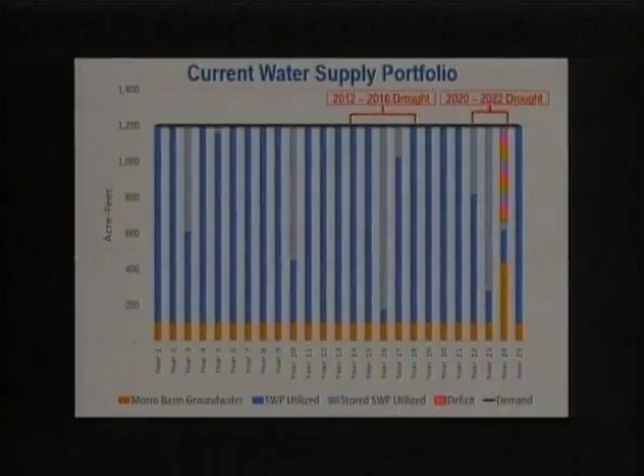Dan, when I look at this graph, it suggests to me that there are recurring significant droughts, but they recur in a relatively organized fashion every few years. But I would think that we're experiencing droughts that are going to become increasingly devastating and come increasingly sooner than we expected. I don't know if that's depicted in that graph. Am I wrong about that?

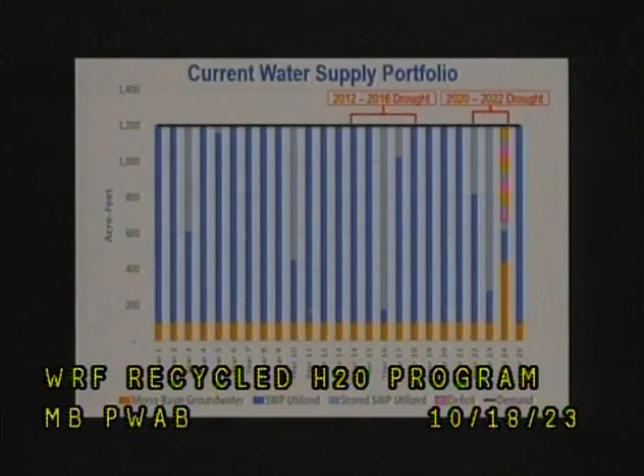Are you asking if the projections account for climate change? Essentially yes, the projections do account for climate change. Climate change impacts are anticipated to bring wetter wet years and drier dry years. We only looked at a 25-year record here because it's more manageable for people to see and understand, but the model can be run over hundreds of years, and you would see more frequent, more extreme dry periods and more frequent, very extreme wet periods, as we saw in 2023. That was a real juxtaposition, going from the worst 3-year drought on record to a year of historic rainfall. We can, unfortunately, anticipate similar conditions moving forward.

I would add that it might sound like a very positive thing that we get a lot of water all at once, but depending on how the precipitation comes down in the Sierras, that may or may not actually be a benefit for our water supply. Just because we have wet years doesn't necessarily mean that state water is in a good position that year. It all depends on the snowpack. Another anticipated effect of climate change is that wetter years will be wetter, but they may be warmer too. So if it's warmer, that means less snowpack.

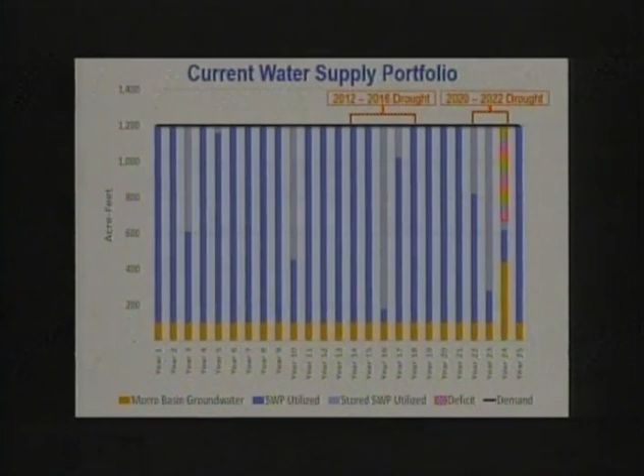Moving on to the next slide, this is a summary of the state water allocations in San Luis Obispo County. We've highlighted the city's allocation in green here. Its water service amount and its drought buffer are the numbers used to calculate how much state water and how much stored state water it can generate in the supply model.

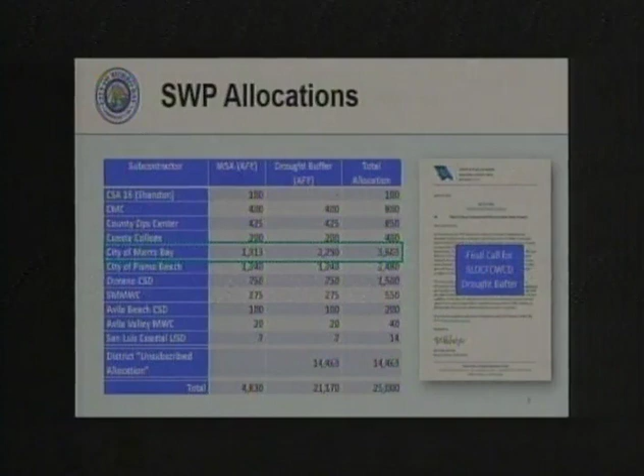What you can see at the bottom is the district's unsubscribed allocation, the 14,463 acre-feet per year. That's the supply of water that the city and other state water subcontractors have really benefited from, since the district doesn't have any other use for that water. It basically generates water available for the city and other subcontractors during dry years should they need it. But as alluded to on the right, the district has final call, because they want to make better use of that water. A lot of that water spills and provides no benefit to anybody, whereas all of the countywide taxpayers are the ones paying for that water currently.

So that's a little bit of an overview on the state water allocations. Moving on to the fund.

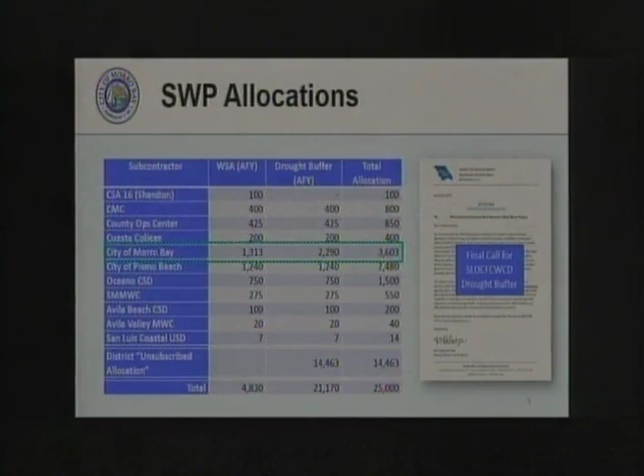I would just add that that's up to the district. We think that's probably true, but they may have other arrangements, transfers, or agreements they may utilize to have that water available for Los Osos.

Moving away from the water supply driver and into the funding and financing requirements. I've got a couple of slides summarizing the recycled water program implementation requirements for the city's two low-interest financing loans and two awarded grants.

Looking at the implementation requirements, they vary based on the different agreements, but they're all binding and required for the city to access this low-interest financing or grant funding. It varies from multiple injection wells—meaning one injection well is not sufficient—to a recycled water production target of 412.5 acre-feet per year within a 5-year time frame.

The Title 16 grant specific funding requirements are still under development, as the city hasn't received its formal grant agreement. The IRWM grant requires 2 or more injection wells, per the language in the draft agreement.

These grants and loans together represent around $150 million of funding.

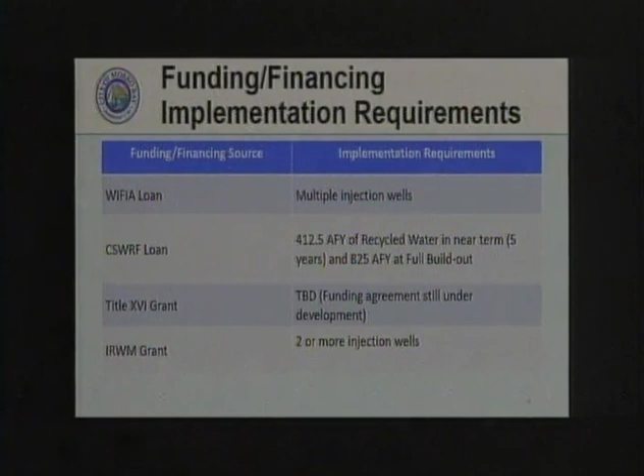There are also schedule requirements for those funding and financing agreements. The city has been working with these funding agencies for a number of years, and there are deadlines associated with the original agreements. In some cases those deadlines have been extended, but what we've been hearing is that these funding agencies want to close out these agreements and programs—they don't want these to linger—so these are the deadlines the city is currently working with.

January 1st, 2025 for the WIFIA loan; August 31st, 2023, though that one is being amended as I described through an SRF amendment; and then September 30th, 2025 and September 30th, 2026 for the grant funds.

So there are implementation requirements, and there are timelines for those requirements to be implemented—not unlike the time schedule order the city was under for constructing its new wastewater treatment facility.

Finally, the third driver or requirement is to fulfill city council direction to incorporate recycled water as part of the WRF program.

These are just a couple of examples—there were numerous public meetings and city council decisions that sent the city down the recycled water path. We've highlighted a couple here, such as the WRF program EIR certification and the Clean Water State Revolving Fund resolution adoption. Both occurred in 2018, as examples of where the city council directed staff to pursue and implement a recycled water program and enter into contractual agreements that require that.

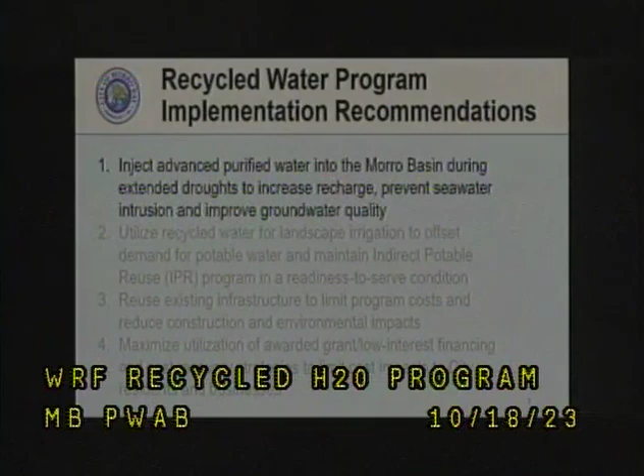I see Dave around town. He's also a musician, likes to perform at local venues.

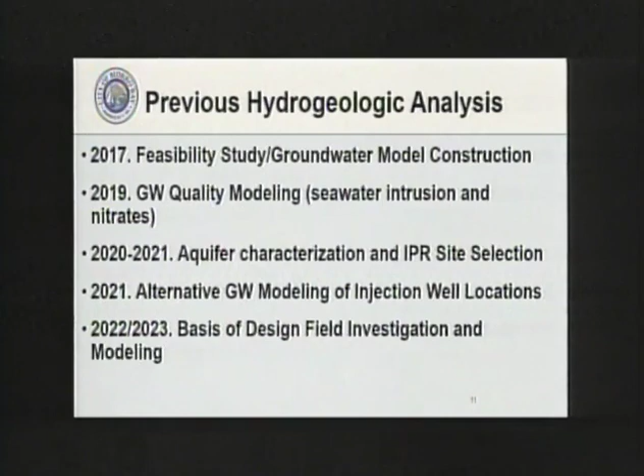The injection well construction and testing that's specific to the IPR project here. Last summer, there was contractor selection, and we went through well design and construction. Rolling into September, we performed well construction with Pacific Well Drilling, and we did traditional aquifer testing on it. In October, we did the wellhead design to inject water into the well, and we did a step test.

We had to take a pause in November for the state water shutdown because we didn't want to be impacting operations during the production well operations. And in December and January, we performed an extended injection test of over a month in an effort to get a real physically based good handle on what the groundwater velocities are out there.

And then since February, we've been analyzing all that data we collected, doing some groundwater modeling, and delivering and producing the basis of design report.

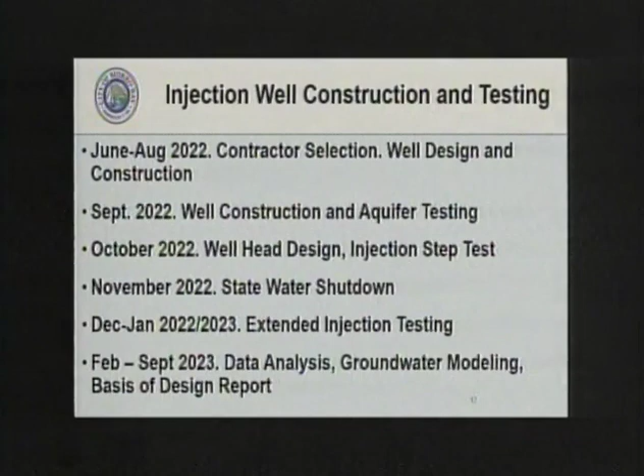This basis of design report's not the first time that there has been drilling and aquifer characterization work done out here.

Do I have a pointer on this thing? Okay, anyway, there we go, thank you.

This figure shows all of the borings that we've identified historically in the basin. There was a lot of work done at the PG&E plant associated with contamination out there. There was a whole lot of holes punched in the ground up here by the old, I don't know, it was Arco, a gas station up here at 41 and 1 that had some leaking tanks back in the early 90s. And there's traditionally been a few borings done along this alignment that were associated with the seawater intrusion wells installed back then. And of course, the city has wells here in what we call the Highway 1 well field. These are the high school wells. So my point is there's a lot of legacy and historical data that we accessed to do this work.

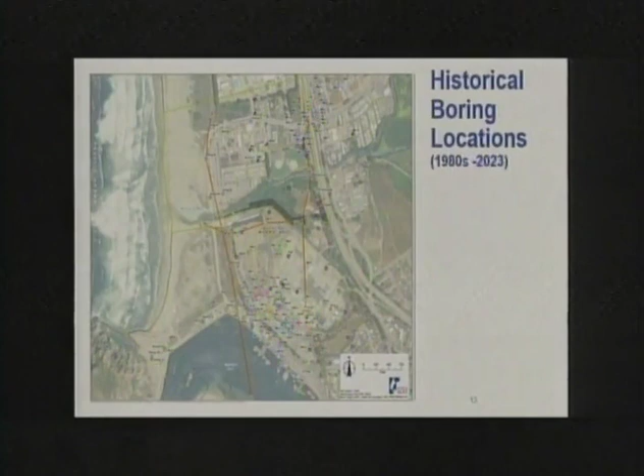There are some detailed cross sections generated in the basis of design report. This is just a simplified version of those cross sections, and in almost every case, we have at the top of the saturated zone a zone of fine-grained sediments, silt and clay, which is generally not considered an aquifer. Lower down, there's sands and gravels that are good for aquifers. That's a simplification, but that's generally what we call the conceptual model, which is the way we see things.

It's that way in the injection zone, and it's that way by the Highway 1 well fields. So this is just a simplified cross-section. Yes, sir. Your monitoring well is only about 50 feet from the injection well, is that correct? That one of them, yes. So this was all extrapolated from that distance over the whole field, correct? Well, when we get to the injection test, there was a lot of data taken from that monitoring well.

This cross-section is a generalization of almost all of those borings that I just showed you, whether they were up by the gas station, over at PG&E, or out by the old treatment plant. They almost all have this stratigraphy: there's 20 to 40 feet of clay and silt at the top, and 30 to 50 feet of sand and gravel at the bottom. So nearly identical characteristics throughout that area. Approximately, yes.

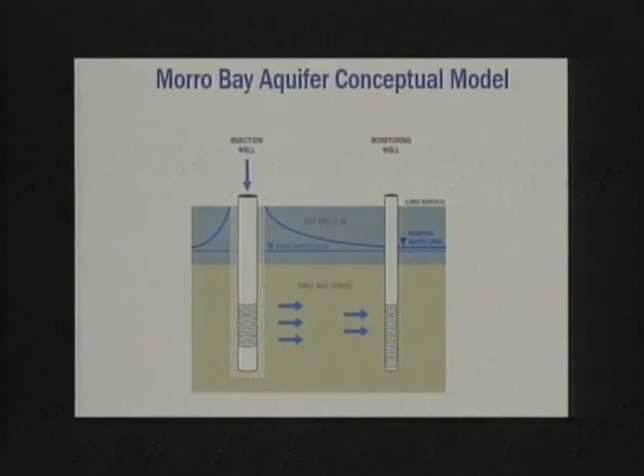These are groundwater level hydrographs. A hydrograph shows water levels through time. I included this even though it wasn't specifically part of the IPR or the injection testing, just to demonstrate something. There are 4 wells here: 2 in the Highway 1 field, 1 out by the old cement plant, and 1 of the high school wells. These lines represent the water level surface in each well, all superimposed. As you're aware, the city doesn't use the wells most of the year, but every November, thereabouts, when state water shuts down, the wells are used.

So you can see, here in November of 2019, the wells start getting used and the water levels go down. But come December, January, when you're finished with that, the water levels recover pretty quickly. That's the main reason I wanted to show these graphs: every year during the state water shutdown, the water levels go down, and every year as soon as the wells are finished being used, the water levels recover quickly.

This 6 to 8 month period here at the end of 2021 was during construction dewatering for the pumping station. You see the water levels declined for much longer than a month. That wasn't because the city was using the water—it's because they were pumping groundwater across the street from the high school for dewatering so they could build that facility. But as soon as construction finished, within a month, water levels recovered back to about their previous level.

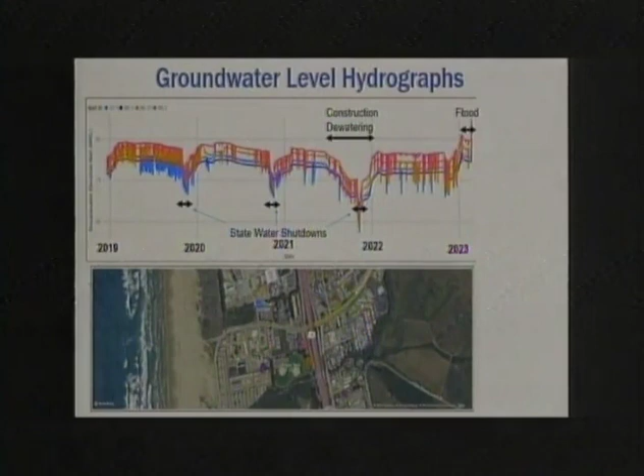These are a couple of graphs that demonstrate historical data for total dissolved solids, which is indicative of seawater intrusion. Without going into too much detail, I'll point out these graphs for MB3 and 4 in the Highway 1 well field—you can see this large spike in total dissolved solids. This is back in 1991. This is showing you that seawater intrusion did happen here. So this isn't just something that might happen someday—it happened back in the drought of '88 to '92.

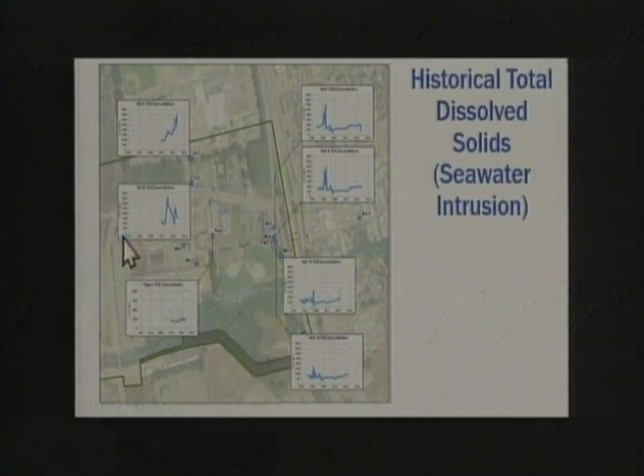The concentrations went down pretty quickly afterwards—so here in the Highway 1 field, you can see that; this is in the 90s. The high school wells weren't installed in the 90s, so you're not seeing it there, but they're a little closer to the ocean, and you can see the total dissolved solids did rise this past year or two. They're on the way down again too. But this is just to demonstrate that seawater intrusion is a real risk here—we're very close to the ocean.

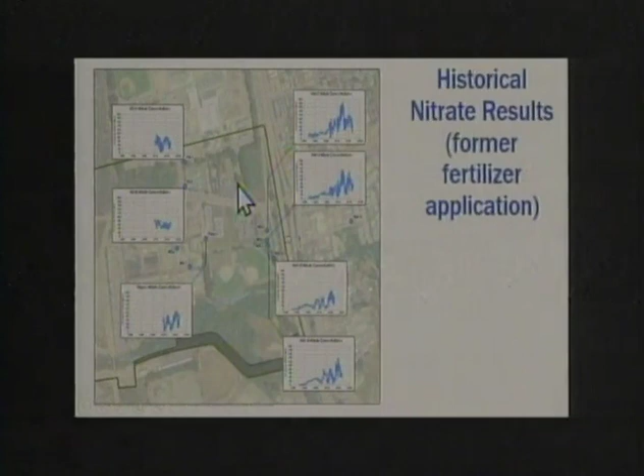These are nitrates in the city's wells. Here in the Highway 1 well field, you can see going back into about 2000, they spiked. We believe it's a legacy fertilizer application from the agricultural fields up gradient. They've been on the way down for the last 10 to 15 years, and there's no spikes here in the high school wells. So this is just laying the groundwork, the base conditions in the aquifer.

Okay, I'll talk quickly about the injection testing that we did. The site is in the permanent easement on the Vistra property south of Morro Creek.

Initially, after we installed the well, we did traditional pump testing where we pump water out and calculate transmissivity and other parameters of the well to establish well yield. We pumped the well at about 90 gallons a minute. We did a 24-hour constant rate test and a traditional extraction analysis.

Then we did injection testing. Initially, it was spec'd to be only a 7-day test, but we decided after thinking about things that we would extend that to a longer period of time. This is where we're talking about the monitoring well you were asking about - there's a monitoring well about 50 feet away from the injection well.

So you may or may not be aware, groundwater moves pretty slowly, right? We're talking about a couple of feet per day in most cases. But groundwater velocity - at this point in most projects, we're using modeling to determine groundwater velocity. So we thought, look, why don't we extend this injection test?

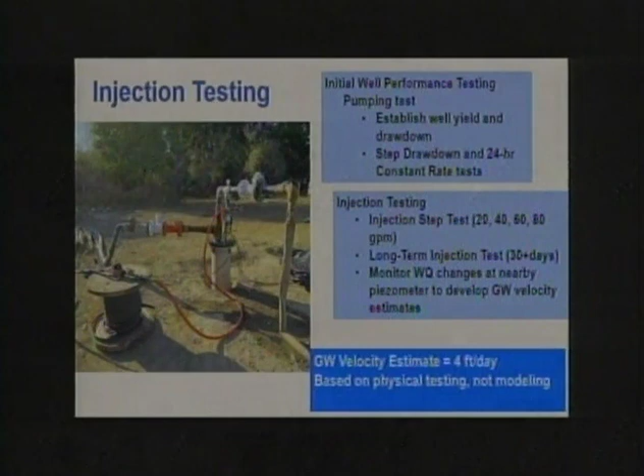And most projects at this point in their completion really don't have this. The regional board was really supportive of doing this effort. So the injection testing completed, and we proceeded with the analysis and started producing the basis of design report.

One thing I'm going to focus on here is groundwater modeling scenarios. We tried to identify places to put the injection wells, and the things I want to point out are that the injection rate of 887 acre-feet a year - that's a full build-out scenario, right, Dan? That's far more than is anticipated to be even available to inject now.

But I believe it was for permitting purposes. They said, well, let's run these full build-out scenarios so we don't have to go back and change the permit later. I think that's correct, yeah.

So I'll show you where we ended up selecting the locations for injection wells, and then we tried different levels of groundwater pumping. We really started down around 500 or 600 acre-feet a year, which is what you currently are permitted for, and we amped it up to 1,000 acre-feet per year, sort of in increments.

We used the 4 Highway 1 wells, the 2 high school wells. We used MB 13, which is east of Highway 1 - it's a mothballed well, but we did a pump test on it a few years ago and it still functions. Then we put a new well in the model across the street from 41, but it could be anywhere. The point was we wanted to move the pumping away from those 4 really close wells in the Highway 1 field.

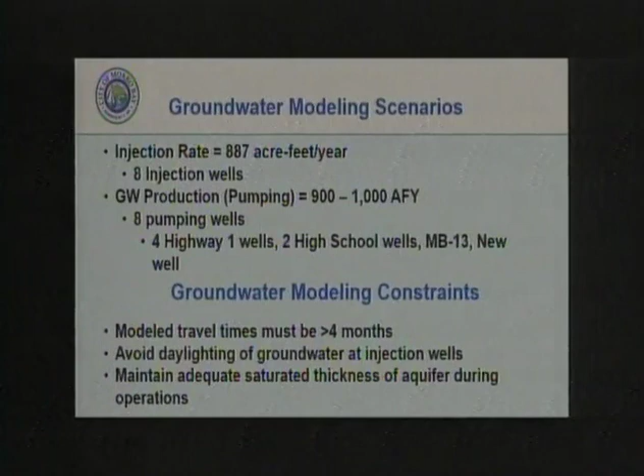Second, we wanted to avoid injecting at rates so high that it would bring groundwater up above ground surface, daylighting of groundwater. That could be a nuisance, and we considered that to be an infeasible consideration. And also, we wanted to make sure we weren't pumping so much that we would dry up the aquifer - we tried to maintain 50% of saturated thickness during operations.

So this is just one of multiple figures like this that are in the basis of design report, but let me point out a few things. Down here, south of Morro Creek, we have the permanent easement on the Vistra property. This blue dot in the middle is the well that we installed - we're calling it injection well 1.

We then put 2 other wells along in this area of the permanent easement. This area we feel is desirable because it's farther away from the ocean, so it's got more freeboard - there's more available headspace for injection there. Also, we've demonstrated that we can inject at 100 gallons a minute there.

So we located 3 wells here, then we located 3 more wells here along the western part of the permanent easement, and then we put 2 wells here along the coast. We only put 2 wells.

These wells are primarily to protect against seawater intrusion, these 2 along the coast. We anticipate injection rates here will be lower based on boring logs we've seen from that legacy data I mentioned. So I believe we modeled these 3 at 90 gallons a minute, these 3 at 75, and these 2 at 50 gallons a minute.

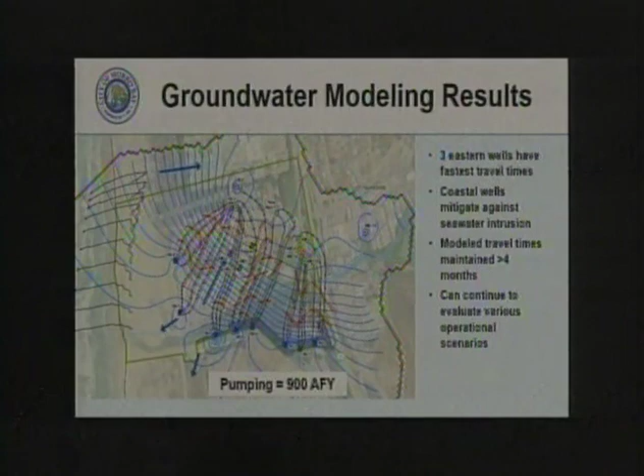Okay, so just a couple of discussion points. It's important to keep in mind these modeling scenarios in the basis design report are the most aggressive pumping and injection estimates currently on the table. We're injecting as much as we think we'll ever possibly need to, and pumping as much as we possibly can. This results in the shortest travel times that we can model right now.

If there's phased implementation of this project, or if we inject a lower total amount of water, that would result in lower groundwater velocities, a greater residence time, a higher travel time. But even with all these aggressive assumptions, we still maintained a 4-month residence time.

Lower rates or phased implementation will result in slower groundwater velocity, and we're going to continue to use this model to look at phased implementation and anything else that the council or you would like to see evaluated.

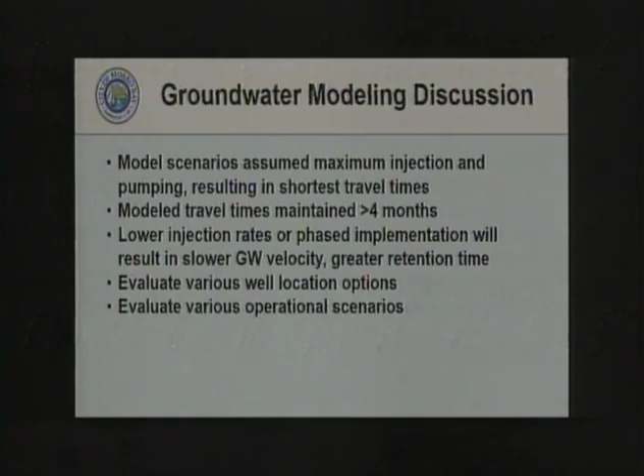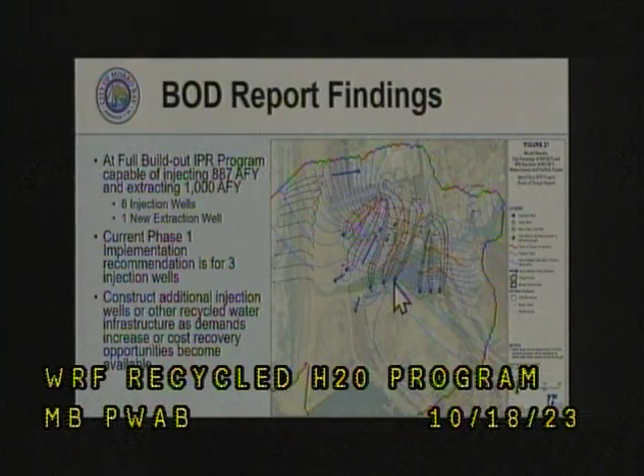Was there any complications because some of the wells may be in the area where PG&E formerly had its tanks? Here's their old tank farm, and we would be injecting north of there. If you inject into a well, half the water is kind of going to go the opposite direction. So if anything, we'd be pushing against anything that is currently at PG&E.

We're not worried about mobilizing anything that PG&E might still have in the ground toward the production wells. I know the site is closed, and we looked into it at some length earlier in the project. The thing that concerned us more than PG&E was that there used to be some sort of construction landfill between the injection wells and the creek. But we found documentation that PG&E excavated the entire landfill—it was concrete debris and things like that—and put fresh fill in there back in the 90s. So because we're injecting north of PG&E, we don't anticipate mobilizing anything toward the production wells.

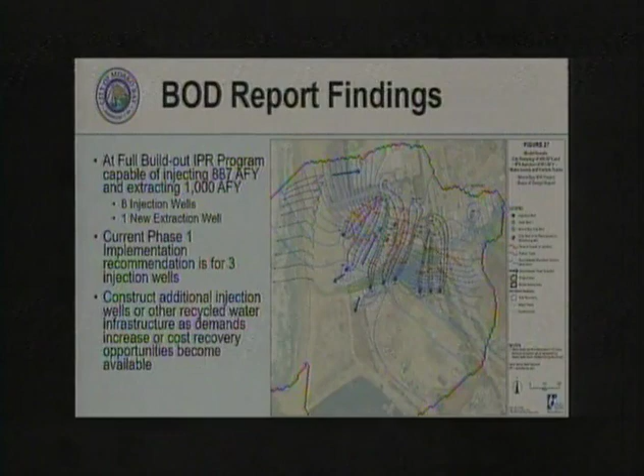I have a question, probably directed to Greg. Would the fact that we only drill 3 wells endanger our funding for the project? No, it would not. We will go into that in quite a bit more detail as well.

It's a good question, and it speaks to some of those earlier slides on implementation requirements of funding and financing. So it's really multiple wells, more than one or two. I think the most restrictive requirement is that 415 acre-feet per year of recycled water capacity—that really is what pushes us to 3 wells, and then, spoiler, a recommendation for some potential non-potable reuse opportunities.

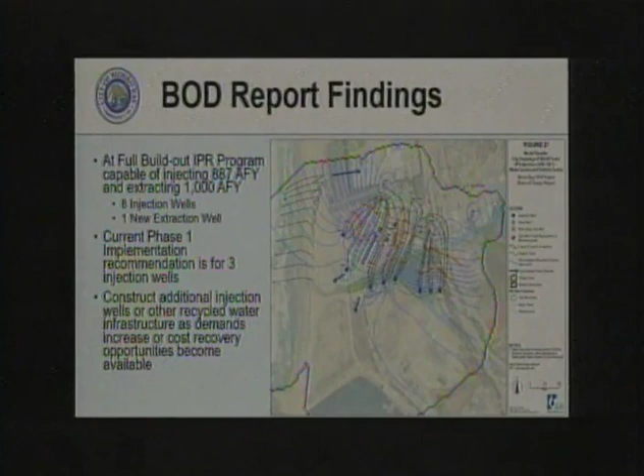Yes, thank you. This is a scenario that models 3 injection wells, so to tie it to the previous slide and the near-term recommendations. Just as we move down through the different recommendations, I promise the other ones aren't as long as the first one.

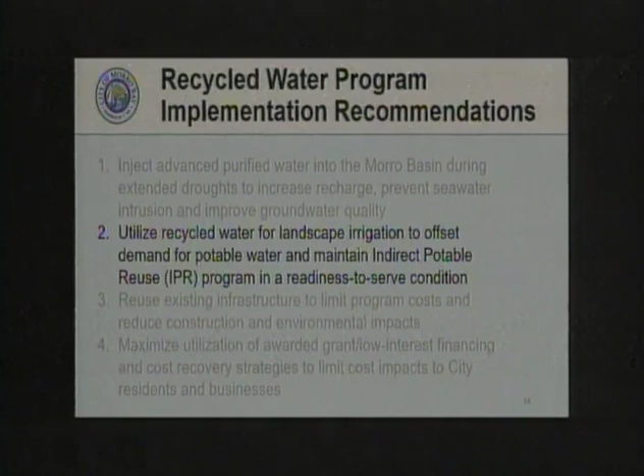The next recommendation is to utilize recycled water for landscape irrigation to offset potable demand, which is as effective, or in some ways maybe more effective than IPR at times. And then it helps us maintain the indirect potable reuse treatment facility in a readiness to serve condition.

As in a recent meeting we had with the WRF subcommittee, the mayor pointed out that one of the things the city observed with the seawater desalination program is facilities don't like to sit there unused. And if you have this treatment system, and if you're only planning on using it in drought years, how are you going to keep it ready so that when that drought comes, it's ready to be used?

So one of the big drivers for recommending incorporating non-potable reuse is that it would be a use year over year. It would keep the treatment facility in good working condition. It would keep the operators with consistent familiarity with how to run the system, so that when we really do need it in those drought years or in an extended state water shutdown, it's a supply the city can readily turn to.

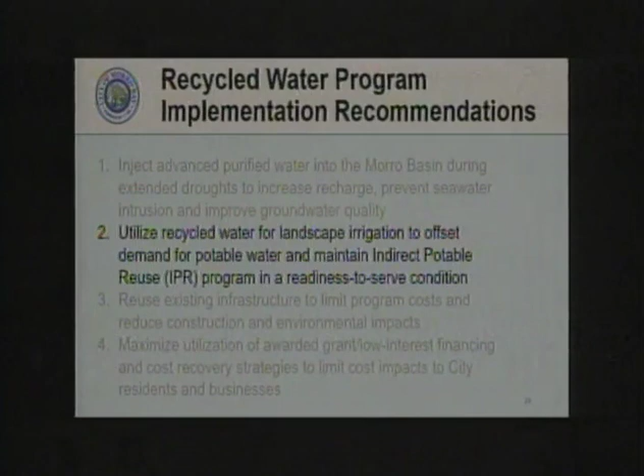When we looked at non-potable reuse opportunities for this recommendation, we didn't do an extensive evaluation of all of the different reuse opportunities. That work was done in the One Water Plan, in the previous planning work that really led up to the WRF program.

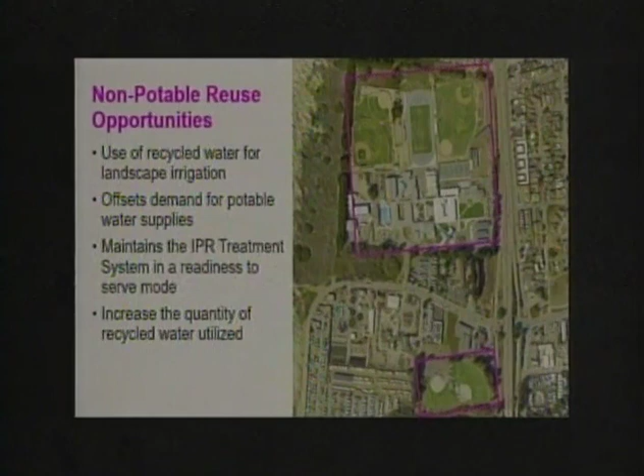What we really did is focus on the low-hanging fruit opportunities for where we can deliver recycled water to offset a significant amount of potable water demand. Those opportunities that are in close proximity to the proposed injection wells are Morro Bay High School and Lila Keiser Park. The other benefit is these two facilities are currently using potable water from the city's drinking water system, so it provides that direct water supply benefit by delivering them recycled water and lowering the demand for potable water on the city's system.

So then we added that into the water supply model. In the scheme of things, it's not a huge amount of water—we estimated roughly around 60 acre feet per year of non-potable water demand for those two facilities. But that's 60 acre feet of reduction in potable water demand, enough water for hundreds of houses, if not more, given the city's low water usage. It just continues to add to the reliability of the city's water supply. Again, the key takeaway here is we're not seeing deficits occurring in those extended droughts.

Greg: Thanks, Dan. I would imagine that the non-potable reused water is more expensive than state water, but less than indirect potable water. Is that correct? Can you characterize how much more expensive than one and less expensive than the other it might be?

We can, and because of the current infrastructure available, it gets a little complicated, but we'll cover that in a future slide. How about that? And I'll let Greg continue.

Thanks, Dan. Just wanted to mention that building this piece of it out also allows for future expansion. It doesn't take too much imagination to understand that in the future we could go down the bike path with the pipe and water Cloisters Park as well. That's one of the major users—I think we spend around $40,000 a year to water those lawns, and again that's all potable water that could be offset. But certainly not something that we're proposing in this stage of the project.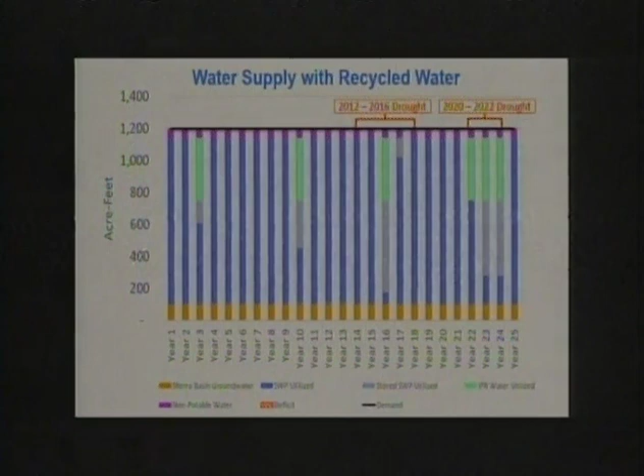Yeah, and speaking of cost effectiveness, connecting users to recycled water requires a lot less infrastructure than injection wells. So it's a way to get more recycled water use to meet those requirements of the funding and financing agreements.

With those pipelines getting to Embarcadero Road and crossing Morro Creek, we have opportunities to deliver non-potable water to the high school and Lila Kaiser Park. This combination of indirect potable reuse and non-potable use allows the city to get to that target of about 415 acre-feet per year for the near-term phase to meet the funding and financing requirements.

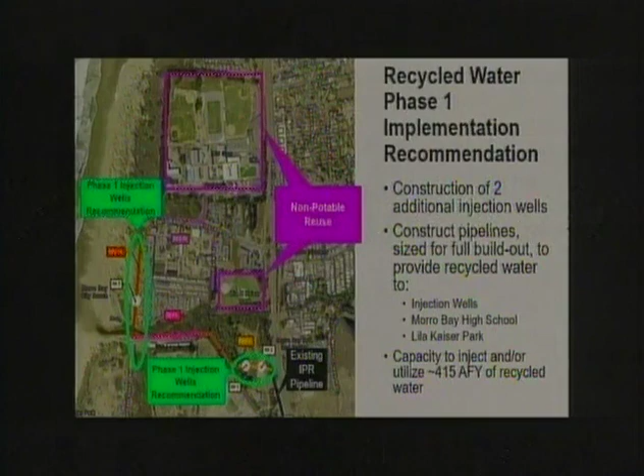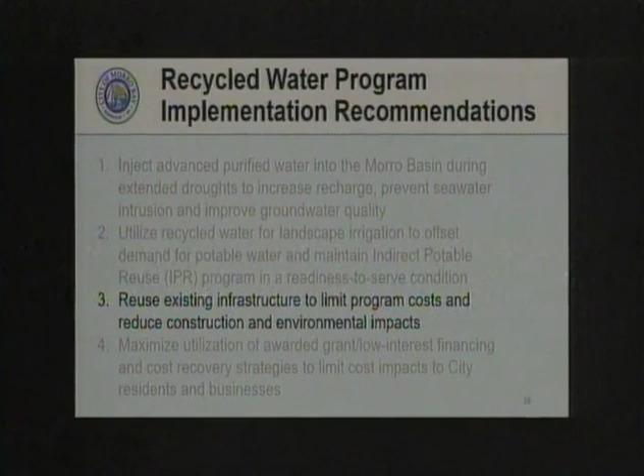So the next recommendation is how we can find the most cost-effective way to construct this initial phase of the recycled water program and then operate it, and also find ways to reduce the construction and environmental impacts. We have a couple of slides on some of the concepts that the recycled water program team is incorporating into the recommendation.

One is we've identified these locations for injection wells. Now we need to route the recycled water to those wells. As the PWAB may remember, the recycled water pipeline, the indirect potable reuse pipeline, is extended along Quintana Road, along the bike path, and currently terminates somewhat close to injection well number 1. But with injection wells located along Embarcadero Road, as well as non-potable uses at Lila Kaiser and Morro Bay High School, we need to get that water over to Embarcadero Road and north of Morro Creek.

So we've begun an alternatives analysis of 3 different alignments. I'll give you the high level. One follows the Vistra IPR permanent easement. This is the shortest distance, but has the most hurdles with respect to biological and cultural resources.

The second alignment is roughly what I call the Marine Mammal Center alignment, or the Lift Station 2 Force Main alignment. It basically mirrors an alignment south of the power plant that gets over to Embarcadero Road. This one has probably some of the least, or really low, environmental impacts, but it would potentially require cooperation from Vistra and PG&E as the landowners in that area.

The third alignment is what we call the Surf Street alignment. This comes off of Quintana, goes up Main Street for a short distance, and then travels along Surf Street. This is the longest of the three alternatives, but has the lowest number of other constraints. It's all within the city right of way. There are no biological constraints that we've identified, and we anticipate limited archaeological constraints.

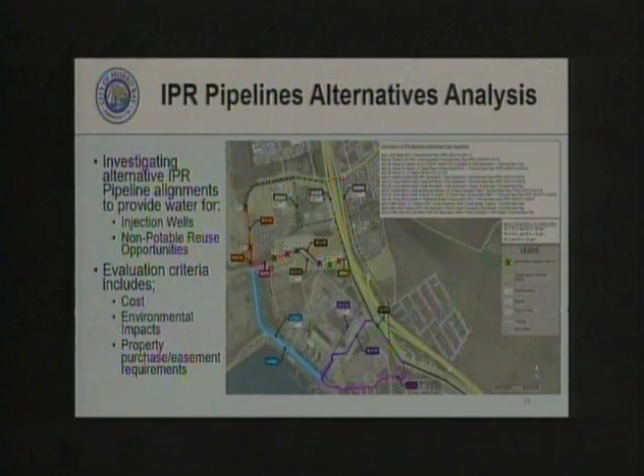But one of the things I really want to focus on, and one of the key things, is that getting to Embarcadero Road and getting north of Morro Creek really opens up a lot of these opportunities that are incorporated into the initial phase recommendation. One of the key opportunities we think we have for the city is utilization of the abandoned seawater desal feed line.

I don't know if the PWAB is aware, but in the 90s the city invested in a seawater desalination facility, dealing with drought conditions, before the State Water Project came online. The city did a number of exploratory borings all up and down Embarcadero Road, which were of great benefit to our groundwater modeling and hydrogeologic evaluation effort, but ultimately constructed a number of seawater desal intake wells along Coleman Drive and Embarcadero Road that conveyed seawater through this pipeline to the seawater desalination facility, where that water was treated, though limited. It wasn't in operation very long.

It then conveyed the concentrate or brine out to the Vistra outfall. With that facility being decommissioned, this pipeline is not currently in use and could, based on our preliminary engineering analysis, be repurposed to convey recycled water all the way from the T-Pier up Embarcadero Road, using the existing crossing under Morro Creek, thus avoiding the need to install another utility bridge, get permits for open trenching, or do a horizontal directional drill across the creek. It then continues up along and turns the corner to Atascadero Road. That's one of the key opportunities we're evaluating and looking to incorporate into the first phase of the recycled water program.

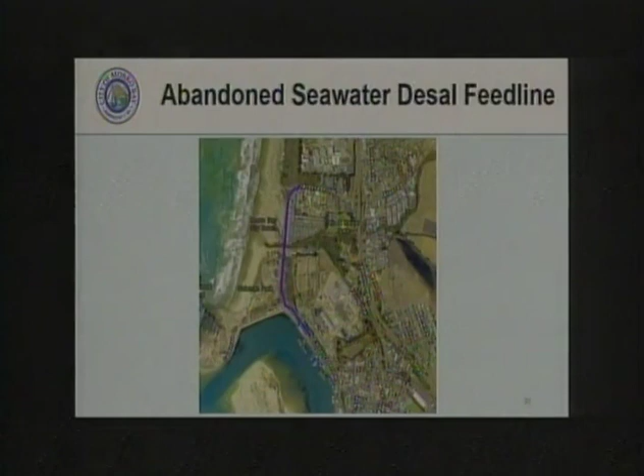The other operational opportunity has to do with how the city operates its two primary water supplies. The city has two modes it operates under. It operates under state water, and when state water is available, the city takes 100% state water, and that water gets delivered to the Kings Tanks, treated, and then goes into the distribution system. When state water is unavailable, the city turns to its local Morro Basin groundwater supply, but has to treat all of that water through the Brackish Water RO facility because of nitrate contamination. So it's basically an on-off operation at this point.

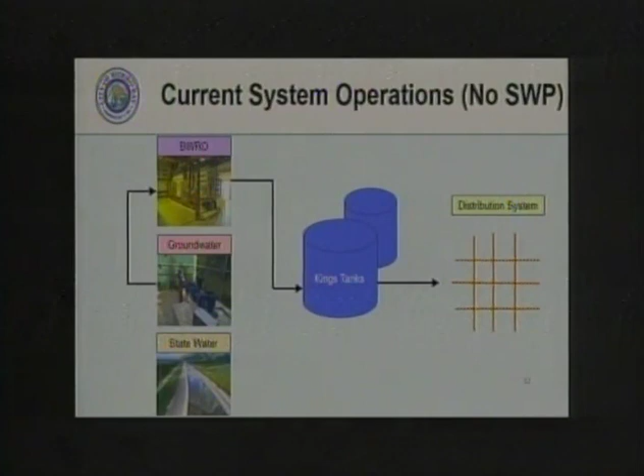However, as we move forward, to eliminate the need to treat the groundwater pumped as part of the IPR program—when the city creates indirect potable reuse recycled water, it's injecting into the groundwater basin—it's recommended that once that water has met the 2-month travel time requirement required by regulators, the city could then pump that water, and during times when state water is available, blend it with state water and send it to the Kings Tanks and ultimately the distribution system. The significant benefit is that we no longer have the operational costs associated with the Brackish Water RO facility impacting the city's ability to access its indirect potable reuse water.

During periods when the state water system is down, the city would still need to turn to its BWRO just to reduce nitrate contamination, until the point that, if enough of this IPR recycled water has been injected into the basin, the modeling GSI has done indicates nitrate concentrations could get low enough—because the IPR water is very low in nitrate—that we no longer have to treat the groundwater from the Morro Basin or blend it with state water.

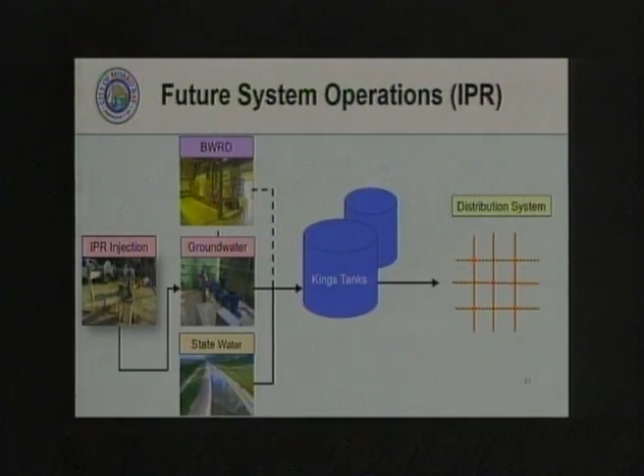Okay, that wraps up the infrastructure pieces of this, the water supply pieces. The last recommendation moves into funding and financing. All right, we'll keep going.

So the last recommendation is to maximize utilization of the awarded grant and low interest financing and cost recovery strategies. Cost recovery means how the city can take surplus recycled water or surplus state water and sell it to others who need additional water, with its new reliable water supply portfolio, to limit cost impacts to the city, residents, and businesses.

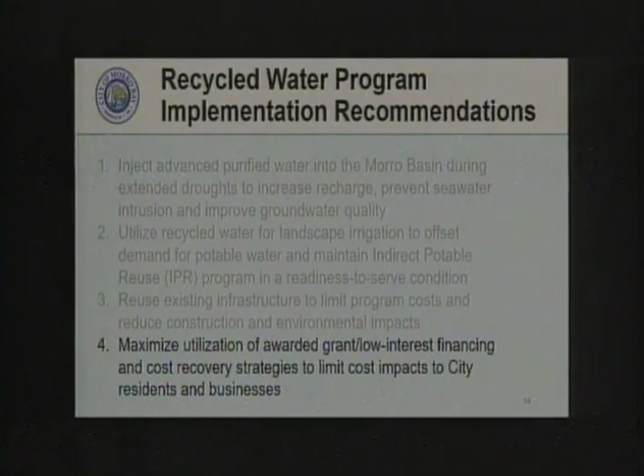The first part of this is a review of the funding and financing components of the WRF program. As the PWAB knows, the city has received multiple low-interest loans, ultimately totaling approximately, with the SRF amendment currently under development and very close to being executed, $159 million of low-interest financing at 0.9% over 30 years—a very favorable interest rate compared to any financing opportunities the city or any municipality would be looking at today. A lot of that, all of it largely, was because the city incorporated recycled water into its program. Without recycled water, the city would not have been eligible for these low-interest funding programs.

Additionally, incorporating recycled water in the program made the city eligible for and allowed it to be awarded $15.5 million in grant funding—funding the city won't have to pay back. So those are just a reminder of where the funding came from. One of the things we tried to do is quantify those savings in terms of what it means for the costs of the recycled water program for residents.

We put together two scenarios, conceptually, which we'll quantify in a later slide. Basically, the city had two options: proceed with a WRF program without recycled water, or a WRF program with recycled water, which it ultimately selected. The difference is that the WRF program without recycled water would have been cheaper, approximately $120 million by estimate, but it wouldn't have been eligible for the low interest financing, so it would have had a higher interest rate. It wouldn't have been eligible for the grants, so there would be no offsetting costs. And ultimately, the city wouldn't have a recycled water program to turn to address its water supply needs. So you contrast that with the program the city selected.

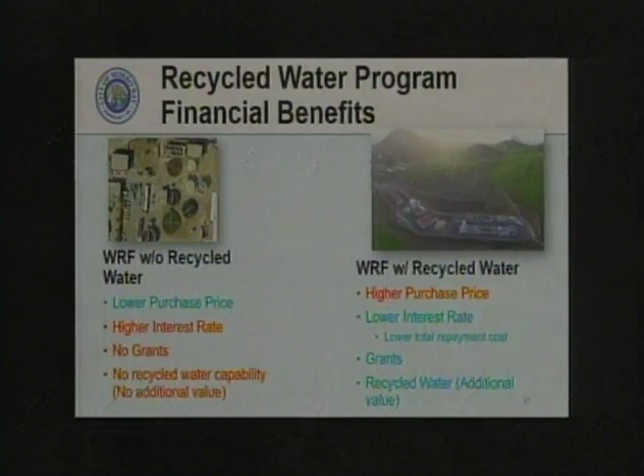Yes, there was a higher purchase price, but because of the lower interest rate, the total repayment cost was lower. The city was eligible for grants, and recycled water is now available to the city as a new component of its water supply. We translated that into a hybrid car analogy versus buying a gasoline-powered car, just to try to make it more understandable. I'm not sure how much it helped, but we tried.

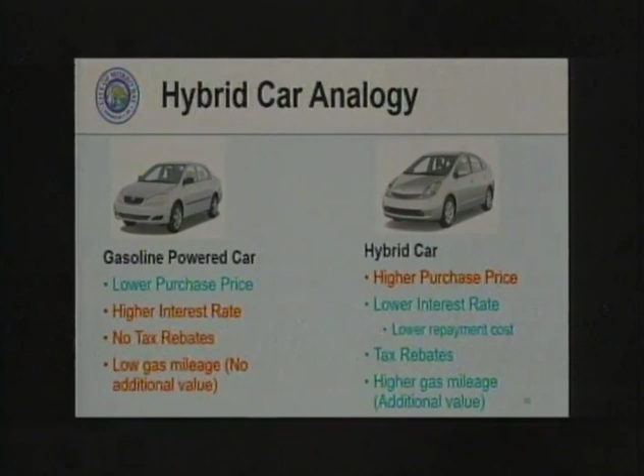You compare a gasoline-powered car is cheaper than a hybrid car, but maybe you don't qualify for the lower interest rates associated with government-subsidized financing programs. Maybe you didn't get any tax rebates because you bought a gasoline-powered car versus a hybrid car that may have been available. And then ultimately, at the end of the day, now you have a gasoline-powered car that gets lower gas mileage than a hybrid car, so you missed out on that additional value. So those are the conceptual components, and then we tried to quantify that, or we did quantify that, really.

So when you look at comparing financing at $160 million at 0.9% versus $120 million at 4.7%, the total repayment cost is $41 million cheaper based on the interest savings. And then you add in the $15.5 million of grants that the city was eligible for, plus the $40 million of recycled water infrastructure value that the city now has at no additional cost, you get a total of approximately $96.6 million of value that the city received by incorporating recycled water into the WRF program.

And then it also provides cost recovery opportunities. One of the things that we talked about earlier is that the district spills a lot of water. The city spills a lot of water too in San Luis Reservoir. Every time the reservoir spills, the city loses any water that it had in there, and typically the city does have water in there. And so Greg is working with the district right now on a subcommittee to flesh out and identify opportunities to develop cost recovery opportunities to sell that excess state water to generate revenue for the city's water fund.

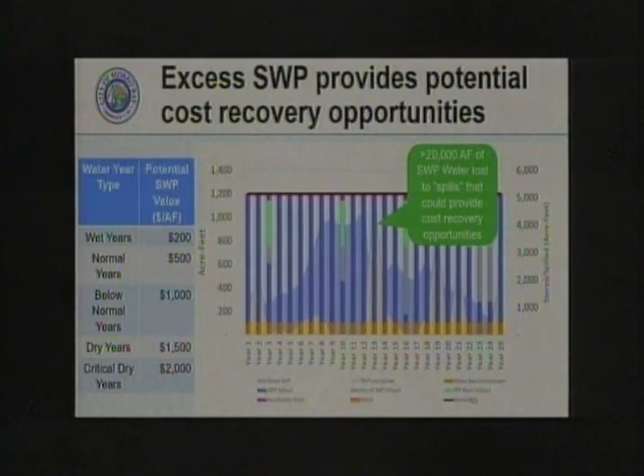And that water can have significant value, but that value does range based on the type of hydrologic period that you're in. This year, you probably couldn't pay somebody to take the water, right? It's a historic rainfall year. But in normal wet years, that water is estimated to have a value of $200 to $500 an acre foot. And then when you start getting into dry years and drought years, that water has values approaching $1,500 or $2,000 an acre foot. Those were the prices we saw for water going in 2021, 2022, that historic drought. So just by having this recycled water program available, it really acts like an insurance policy and generates extra state water that the city could consider and look for opportunities to sell in the future.

The state water costs about $300 an acre foot to deliver, and that pays for the pumping, treatment, and chemicals to treat that water. The city pays a fixed cost for state water of approximately $1,100 an acre foot, but again, this is the variable cost, and that's in some ways what we're comparing these other costs against. To pump groundwater out of the ground is relatively inexpensive, about $35 an acre foot. However, if you're going to treat it through the brackish water RO facility, that cost goes up significantly to $780 an acre foot. To run wastewater through the Water Resources Center advanced treatment plant costs approximately $574 an acre foot.

This is a somewhat conservative assumption, again to board member Ingrafia's comment, to provide water for non-potable reuse. We're assuming it costs $539 an acre foot, and that we're delivering IPR water for non-potable uses because there are a number of challenges associated with delivering a lower quality recycled water through the IPR infrastructure, which I will go into if you want, but let's move past for now.

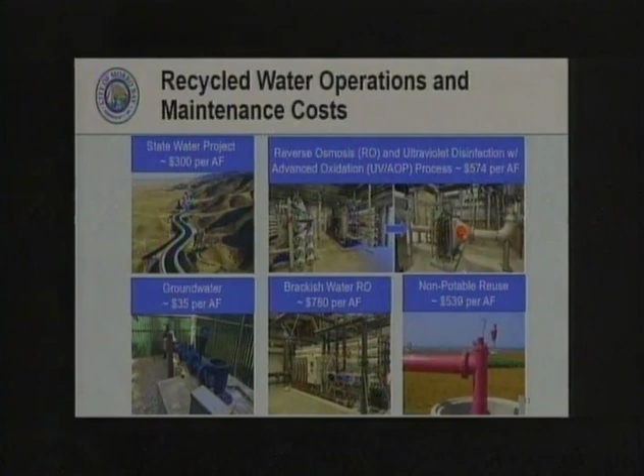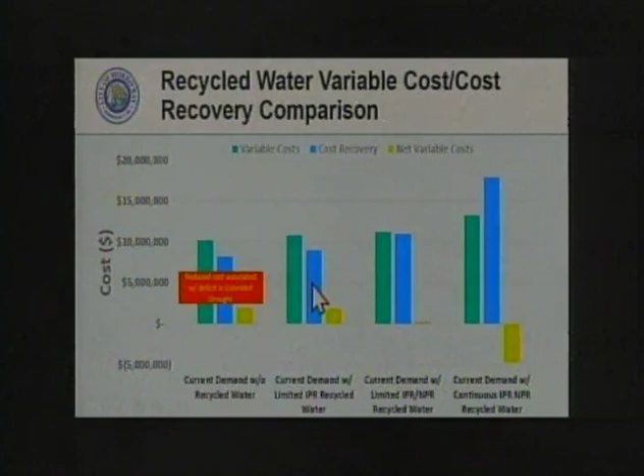All right, so let's pause there, and then we'll go into next steps.

Put simply, if the recycled water is at full capacity in five years, some 400 and some odd acre feet, that would allow us to sell some of the state water we'd otherwise consume and recover some of the costs. So my question is, from the state's point of view, maybe there's a contractual obligation here, I don't know, but it's taking valuable water that might be used elsewhere in the state and presumably sending it to Morro Bay, which doesn't really need it because we have this injection. There are no guarantees, of course, but are we confident that would still be the state's position, rather than the state saying, I'm sorry, you built this wonderful plant and you're injecting water, and by the way, we're not going to contract with you for that much more water out of the state water system?

I don't think there's any concern that the state is going to take away the city's state water. But what I would say is the state is actively looking for agencies to develop their own local supplies, and that's a big reason why this low interest financing and grant funding is available. The state wants agencies to invest in local resilient water supplies so they're less reliant on that state water system. So I would think the state would applaud the city for taking this initiative, but not penalize it by taking away its state water.

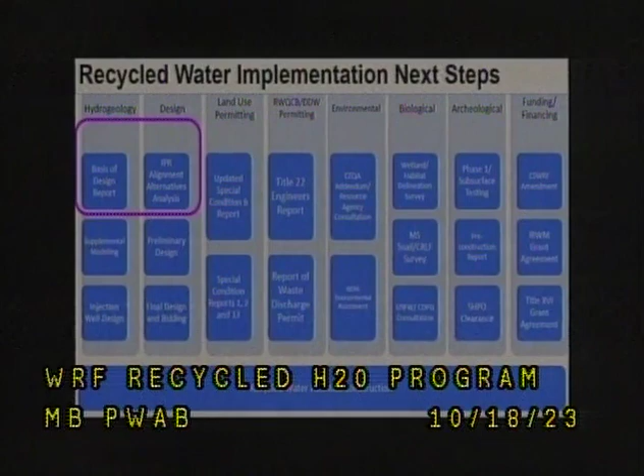Okay, so moving into next steps. Here's a slide that breaks down the recycled water program into a number of different disciplines or components. This outlines the steps the city needs to take to get from where it is today, with the basis of design report and the IPR pipeline alternatives analysis underway, to the bottom, which is construction of the recycled water facilities. I don't need to go through each box, but I want to illustrate that there's still quite a bit of work to do to meet the schedule requirements for the funding and financing programs.

And this work spans all disciplines: hydrogeology, design of the recycled water facilities, land use permitting through the coastal development permit, permitting with the regional board and the Division of Drinking Water, the CEQA and NEPA analysis required for the funding and financing programs, the biological and archaeological surveying I described earlier, and funding and financing agreements as well.

I want to emphasize this slide because you may have seen public comments questioning the direction of using the Morro Basin or using indirect potable reuse in general. The city staff answer to that is: construction takes time, and to get to construction, we have all these steps that'll take a couple of years.

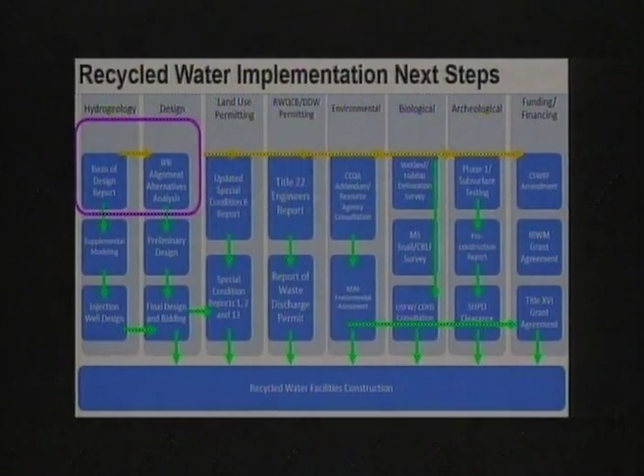Just a question about the penalties for not meeting those deadlines. What exactly might the penalties be? I know that the agreements afford attractive interest rates and sizable chunks of money. Would it be the total cancellation of a loan agreement, or a penalty, or any way of assessing what some of those delays might cost?

Yeah, we've done the analysis, we do partially look at it. If the city is unable to meet its obligations under those funding agreements, that low interest financing could get revoked, to the tune of the city needing to finance the entirety of the WRF program through another mechanism at interest rates — 4.7% was an estimate of bond interest rates back when the funding was originally obtained. I would suspect that they're higher even now with the recent inflation. I would say that would be catastrophic.

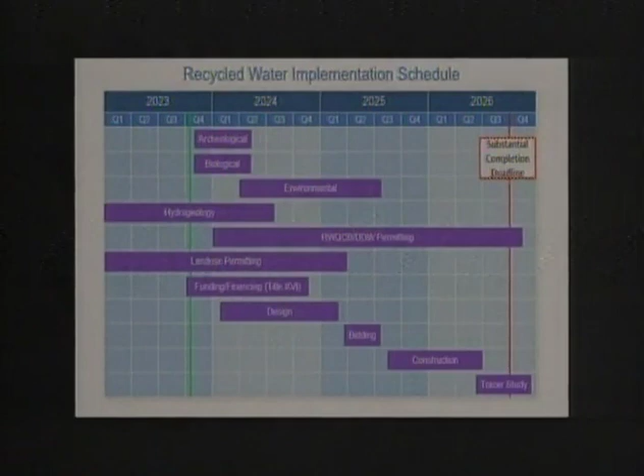Just as a conclusion, hopefully I warned you there's a lot here in this presentation, but just to try to sum it up: the WRF program team is recommending a phased implementation of the recycled water project to allow it to reduce the construction costs of the project, to allow it to streamline construction completion, and to deliver a project that addresses the city's near-term and potentially long-term water supply reliability needs. A phased project also provides flexibility for what the future phases could look like, and different opportunities for recycled water use for other components. And then it ultimately allows the city to meet the requirements of its grant funding and low interest financing agreements.